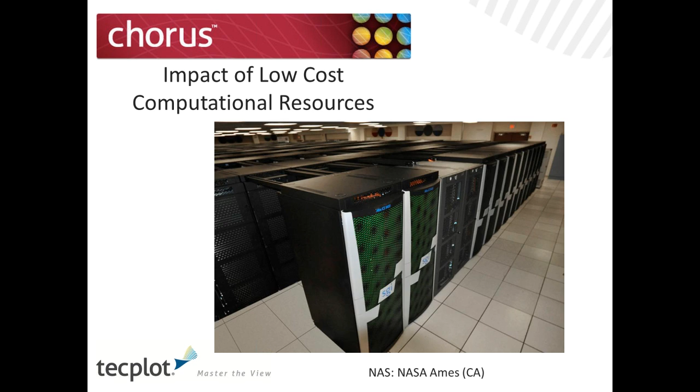And that includes actually hybrid methods, which we'll talk about a little bit today, where people are using low-fidelity simulation with surrogate models to apply high-fidelity simulation to model system performance. And what we've been working on here at Tecplot is really coming up with a solution for simulation analytics, which is really bringing together the analytics piece, which is new, I think, to this arena, physics visualization and data management, into one tool which allows you to analyze system performance.

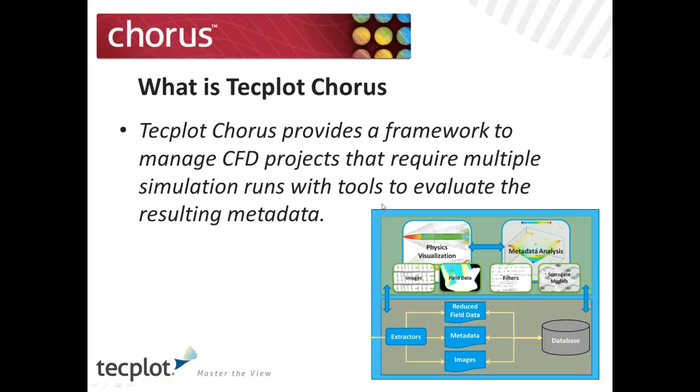Let me just first say, this is a collection of work probably done over a number of years by hordes of graduate students and undergraduate students. I get to kind of sit at the end and report on a lot of great things that go on here at the University of Colorado. So my intent is not to make it seem like we churned this out overnight and made it really simple and trivial; there's a lot of work that's gone into this.

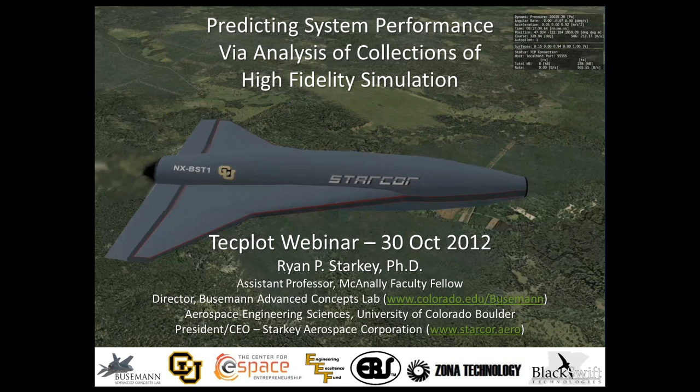So today we're going to talk about, as was mentioned, system performance analysis, looking at high fidelity simulation and how we embed that and understand what it implies for design. Obviously, as was mentioned, design is getting more and more complex, and there's lots of things that go into a rigorous analysis. As a university professor, we also really embrace engineering fundamentals, kind of back-of-the-envelope textbook level analysis. And so how do we bridge those two extremes when we talk about design?

So the overview for today's talk, some of it may be a review for many of you who are involved with design work, so I apologize for that. We won't labor on some of the really simple points, but just understanding systems development, what it means, thinking in the big picture context, looking at surrogate modeling, a couple of different examples of how we may apply surrogate modeling and why it's important, and then roll that back up into how that bridges those gaps for multi-fidelity data.

So for low fidelity, as we like to do a really good preliminary level design, we want to use low fidelity data. Obviously, eventually, we're going to need to use a lot of high fidelity data, and putting them together inexpensively is always the goal. And then we'll wrap it up with going over an application of a supersonic UAV we've been developing here for the last number of years, and then maybe draw some conclusions from it.

All right, so I guess the context first is important. Why are we interested in this? Obviously, multidisciplinary design optimization theory is great, and we do a lot of work in the fundamentals of that, as you'll see. But without a goal, students sometimes get lost. So we try to have both here.

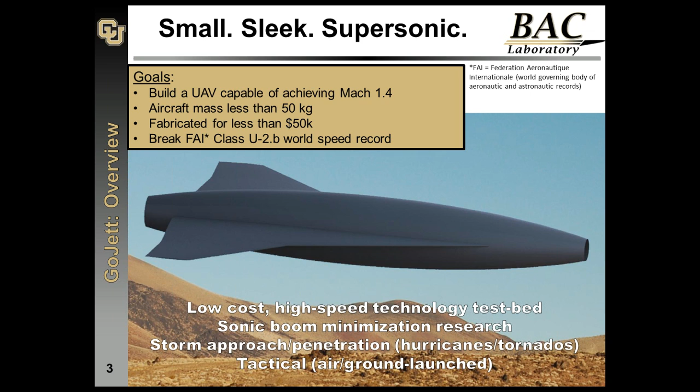Okay, so the basics of what this... I'm sorry, I'm having a controls problem here. Oh, there we go. Do you still hear me?

It's a team of students who are essentially learning as we go, both discipline and kind of engineering, system engineering as a guiding principle. So we have a lot of design challenges, and we don't have a team of experienced engineers with a lot of tools that they've used for years. We're kind of learning and training as we go. And so obviously to go through this sort of mission with the supersonic leg in the middle is not a trivial endeavor. So this is essentially our guiding principle of what we're trying to do, and we'll refer back to this later on at the end when we try to tie the tools back to this goal.

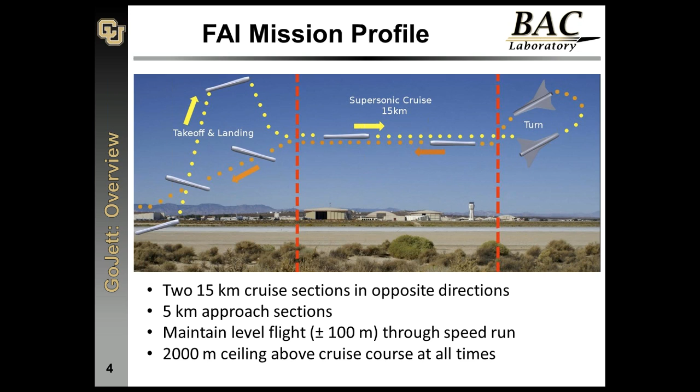And so, notionally we look at aircraft that we see today, maybe an F-22 or F-35, and think back to the decades that we've taken through both propulsion system, aerodynamics, and putting it all together. It is a long, complex, expensive endeavor to come up with a new aircraft design. So obviously, in the classroom and in the university setting, we're not going to go through that. We don't have 2 decades. We're happy to get their attention span for 50 minutes.

But if you look at the middle block, this is the problem that we always have. There's more conceptual designs than we can even maybe generate and or analyze. And so how do we go through this really simple design analysis? How do we boil that down to a couple of conceptual designs that we may want to focus on? And of course, this is easier to do. Sometimes the conclusions that link those 2 stages are not correct, but we can always down select from a lot of designs to a few designs.

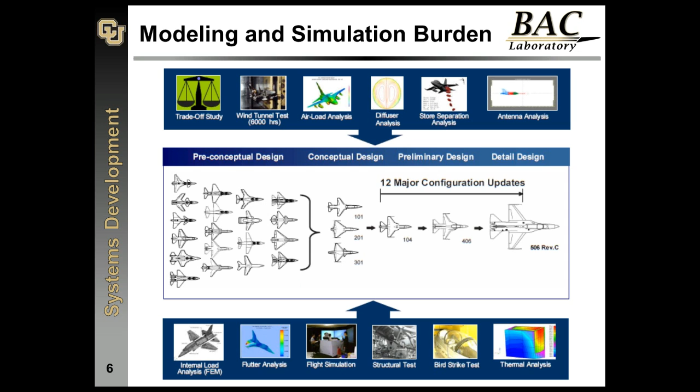So the goal of today is to kind of maybe bridge that gap. We're saying those are still important, but we need to think a little bit differently. So wrapping what you see here on this chart into maybe a software architecture, things get a little bit more complicated. Pictorially, looking at the pictures, we can understand why these things are maybe interesting, challenging, difficult. Even if I'm just a student who's focused on one particular thing, this is my one particular area of expertise. But eventually, everything has to essentially talk together, work together.

Tools need to be integrated. Sometimes they're loosely coupled. Sometimes you can use much more elaborate software to couple them, depending on your desires and your budget, really. But so this is a sample architecture for a high-speed vehicle design, and the same thing exists for really any vehicle design. So I continue to use this as a great example, but there's a design part, there's a trajectory part, there's, in case of high speed, and even for ours going supersonic, parts that require thermal protection,

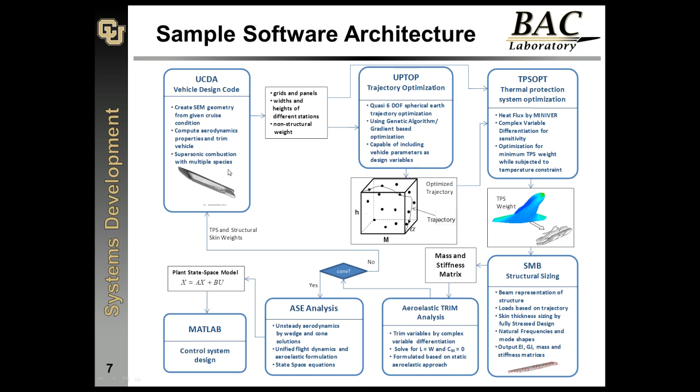especially around our afterburning engine. Structural sizing is traditionally a really hard thing to do in conceptual level design and preliminary level design. Aeroelasticity, again, a difficult component. Control systems. We wrap this all together and we try to come up with a vehicle. And generally, the way that this happens, I would say notionally, is low fidelity. So somewhere we need to talk between low fidelity or high fidelity and how to bridge the gap.

So the gap is really the surrogate modeling. How do we understand surrogate modeling? How do we put the pieces together where we can have a surrogate model that takes our complex data set and reduces the number of data points that we really need to run, so we can do a good job of minimizing our computational expense while still extracting the most usable information from our system. So the surrogate modeling, obviously, oops, I've lost control. There we go. There's a lot of driving goals of what we're trying to do with surrogate modeling that tell us what we're trying to do.

And so the extreme example I like to use is a high fidelity, say a large eddy simulation, CFD code that might take, on a complex case running in parallel, days, a week, depending on how much computer resources you have. It takes some considerable amount of time. Well, what happens if I want a wide understanding of my design? I need to run those cases to excess to understand the design limits: high angle of attack, high angle of sideslip, altitude changes, Mach number changes, etc. Well, what happens if I want to do that same level of trade study, or the same level of understanding, while I'm changing my vehicle configuration?

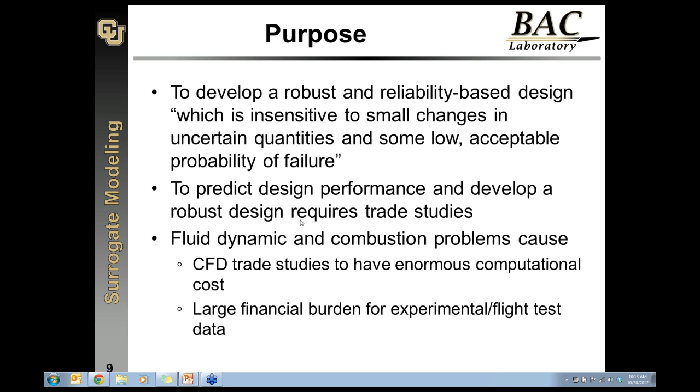But the computational cost when we want to understand vehicles, vehicle systems, vehicle performance, vehicle design, as I'm sure everybody's well aware, is a challenge. So let's make sure I have control here. So how we address that challenge is through surrogate modeling.

So if you're not familiar with surrogate modeling, really it's just what I call exotic curve fit meta modeling. You might hear a lot of different names for it. But it is just a way to take a few data points and extrapolate to a larger design space. So different models are definitely available, and if you search the mathematical literature and some of the design literature, you'll see differences for coarse or fine systems, how many data points I need. Are they ordered data points in a structured sense, or are they randomly distributed around a design space? Different models handle different constructs better or worse.

And of course, the goal is how do we use only a few data points for a large dimensional space to capture the physics. And then the other question we have to answer is, we're going to run a few data points, and maybe each one of these took 1,000 CPU hours, I don't know, and then try to understand how that relates back to our system, but with the question of, is the model we're generating even correct? Obviously, if the model is not correct, we're using it in a very dangerous way, because we're going to use it to predict design.

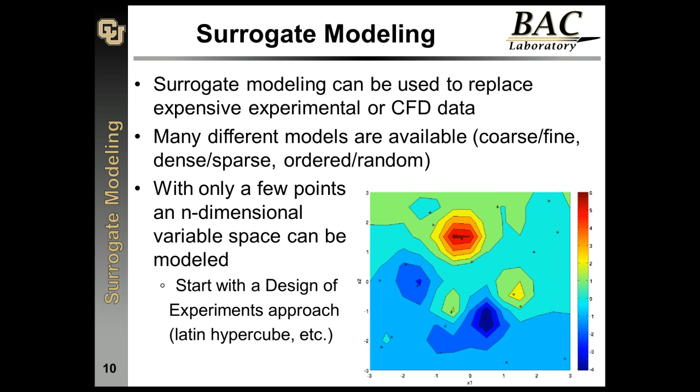So there's a couple of different things that have to go here. We can't just take a black box approach, put some data points into a generator, come up with a model, and assume it's correct. We have to essentially go through this test. And for anybody who's done something like a design of experiments, which is essentially an optimal approach to distributing your set of data points to minimize your costs, such as a Latin hypercube approach, these are very good places to start with a data set. We want to minimize the number of inputs, distribute them around our design space as optimally as possible, at least initially, and use that as a good starting place. And so that's what we will do.

But this is the danger of any sort of curve fit. Really, we can fit anything. How good it is is another question. So with Kriging, there's definitely ways to do optimal positioning of new points based on the maximum likelihood of error of the existing model. So sometimes you may extract one point, test your model to see where the maximum likelihood of error is, and then use this sequentially to add points and keep essentially pinging your model against what you think reality is, or the pseudo-reality, and minimize the sensitivity of the model to the point addition.

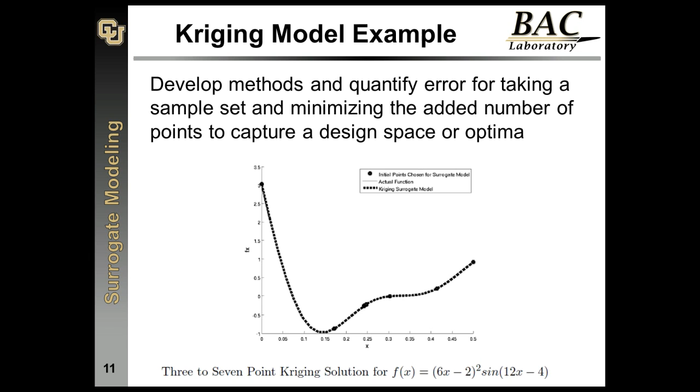And so the next chart is a really brief algorithm example, so that when you maybe look back at this later on, you have a complete idea of what is going on. We have a random input, and in this case we literally use some random inputs because, for this example, it stresses the data in a little bit more interesting way than using a really good design of experiments.

But we select some sort of inputs, we build a surrogate, we run our functions at some of the surrogate points, we can validate the surrogate, we can re-add new data points, and then continue to go around this loop until we're happy with the surrogate. And so in this case, the surrogate becomes a very interactive feature with design. We need to start our design and then let the surrogate essentially drive where new data points go after that.

And so this is, I'd say, the one piece where it's different than maybe how education is generally done, where we generate a lot of data and just fit it, hoping that it's going to be good because we have no more data to add, we can't run another test, we're not going to run another computation, and that works fine as well. But I think the real advantage to surrogate modeling is to use it as an interactive guide.

So we're going to come up with the best first estimate of our design of experiments, and we're going to use that to push our design forward, while using the surrogate to drive where the next points should go. So either computationally or experimentally.

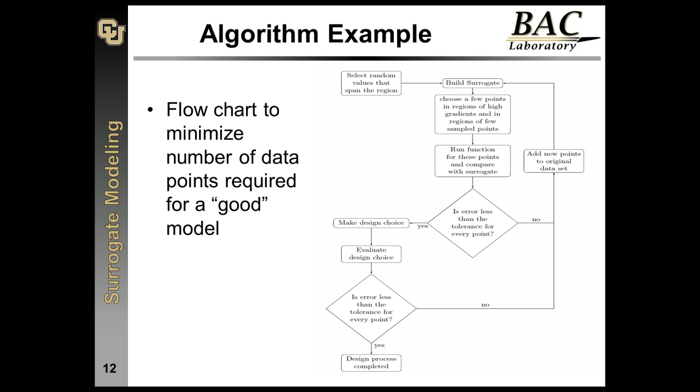So going on from here, the next step is obviously if we're looking at complex system design, we want to build a surrogate. We want to understand, in the same light as before, how do we build a surrogate that matches our design space without knowing where our design space is.

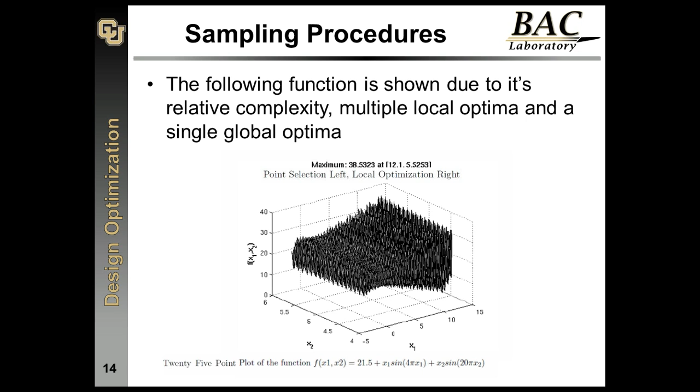So in this case, I would want to have a way to start my system, create some initial data points, and what you'll see is we're just going to do an initial random sample of 25 data points through this space and come up with a surrogate. And what you see is a surrogate that doesn't really represent the data well at all.

But what we're trying to do is use the surrogate to help drive the data behavior: where should we focus in, where's the right region perhaps, and can we use that to focus where our next series of computations are. So when we do some more expensive computations or some more expensive experiments, they're done closer to the region of interest that we're really going to hone in on.

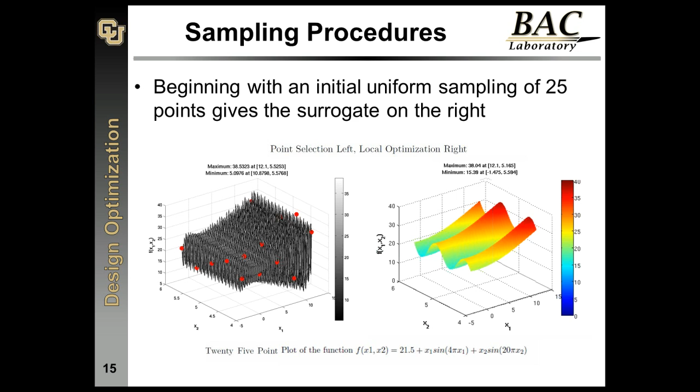So in this case, 25 randomly distributed points did a really poor job, I guess if that's the correct word, of capturing this design, because there's nothing that's going to capture this design. But we use that to down select. So the system says, well then here's the region of interest. It's back here, back in this corner. So let's kind of hone in on there. We'll add in some points, and we'll do another surrogate.

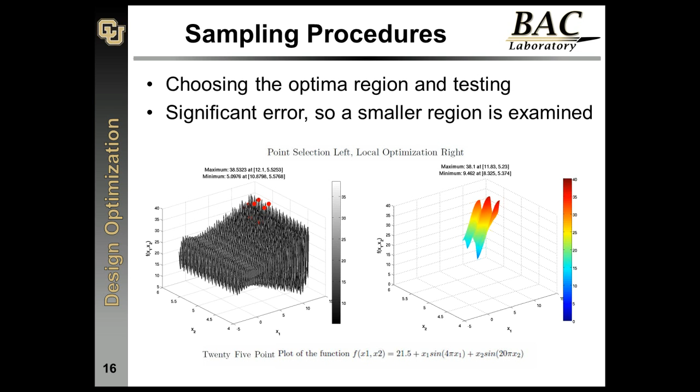So now we've honed in again, and again, the surrogate does not match the space. What we're doing is just randomly populating. You see some are near the peaks, some are near the valleys, and it's coming up with a surrogate of what this system is doing. And we're going to go through this procedure again. We're going to hone in again to the back corner.

So when we put it all together, what you see here is, we were looking for that maximum point, and so our design was focused at that. So the error that we achieved in the surrogate at the maximum point was about 0.5%. I'm blanking here at the number of total data points, but what we did is took a complex space, initial surrogate, and we start to build. So what you see in the final picture on the right is this compilation of all the data points for the overall surrogate. So again, it does not match the correct data space, but what we're looking for is where's that right region of interest.

And in this case, the surrogate model function value at that maximum point was off by 0.5%. The minimum, which we weren't focusing on, was 14%. So again, if we want more information, we need to take more data points. And we do get some X and Y errors from where our positions are. But what we have effectively done is gone through a very expensive, very convoluted design space with a pretty good success rate using a minimal number of inputs.

And so this is really a good extreme example of where and why surrogates are helpful. Obviously, we're not going to be able to populate this whole data space with computations to map it out correctly in any event. The best we're going to do is come up with a number of good points and a data structure that hopefully represents it. So I think the good news is, especially for complex vehicle design, nothing ever looks like this. So this is really an extreme example that shows the functionality of using surrogates and surrogates for optimization.

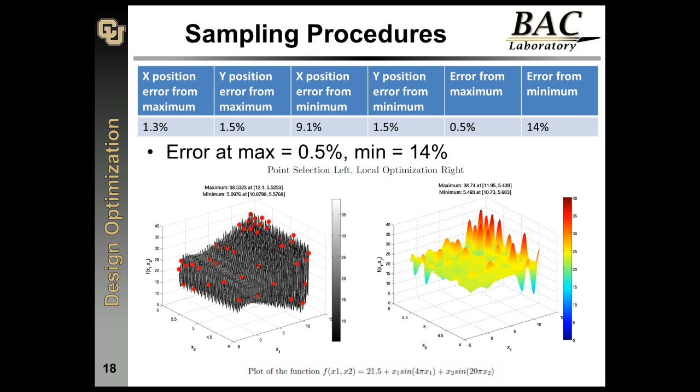We have an n-dimensional design space, and here our n is 10. As we go to more complicated designs, we're going to get away from some of these, I'd say, simplistic design parameters to much more refined design parameters, and that's going to make that curse of dimensionality, or that overwhelming amount of data, something we're going to have to figure a way to deal with to some degree.

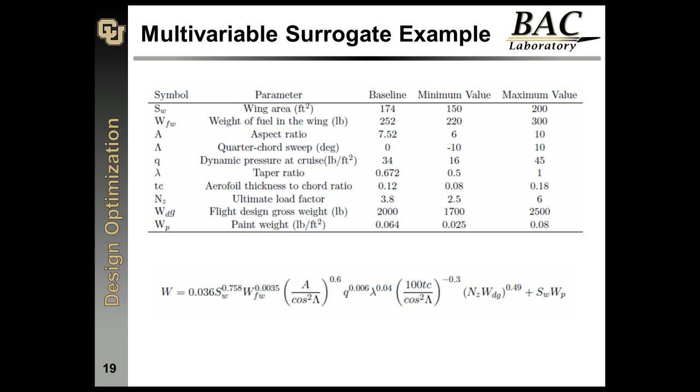So when we look at multiple dimensions, what we see is this. We can essentially create, at least in a visualization sense, surrogates of all of our input parameters, all the things that drive our design. We can look at how they all correlate one to another, how they all contribute, which ones are fairly benign and linear in a sense, which ones become a little bit more nonlinear in behavior that we may need to focus our design in a little bit.

So again, in this case, we tested this with just a random set of data inputs and created some surrogates. What you see is some hopefully very traditionally understandable behavior, interaction between some of these variables, sweep and wetted surface area, et cetera. So there's nothing, I would say, hopefully brand new knowledge that's wrapped in here, because it's a very apparent problem that we're working through in terms of aircraft design, but it does show how we can now use surrogate modeling in a lot of dimensions and start to at least use that to drive the analysis.

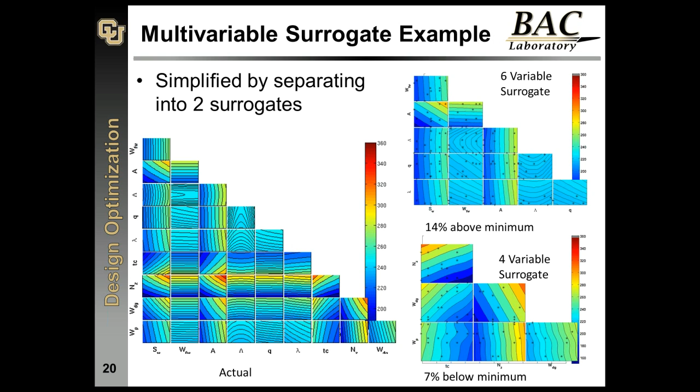So if you extrapolate this backwards to a complex system design, what this is going to give us is a way to understand those parameters we really want to focus in on. And of course, what we also have is maps or surrogates of our entire design space, where we can now put this into an optimization routine and use this surrogate to do our design. So surrogate models are a very powerful tool. The one way that we've been looking at doing them here at University of Colorado is, of course, now multi-fidelity.

We like to start very academically. It's very similar to the last problem. How do we understand the design problem, boil it down to its meat and potatoes, do some back-of-the-envelope calculation, which we know is prone to some error, but it points us in the right direction. And then inevitably, like any design, we're going to want to do some validation. We're going to run some high-fidelity simulations of our low-fidelity designs and see how they calibrate. And so that's generally, I would say, a practice that's done.

What we're interested in doing is maybe pointing that backwards a little more. What you see here is low-fidelity data. That's kind of a standard approximation. We're going to run high-fidelity data, possibly at the same data points, to understand what is happening. And what we're trying to do, as you see in this very simplistic block diagram, is understand that error, which is what always happens in design. I come up with an approximation, I run a simulation, I want to understand how good my approximation was, which is great. I'm understanding a fine point of error.

But what we're trying to do here is use surrogate models to calibrate that entire data space. So if I can boil my problem down to some much more canonical, simplistic versions, which you'll see here in a second, then I can run low-fidelity data, in which case ours is an analytical model. I can run high-fidelity CFD data. I can understand the differences between the two. And then what we're doing essentially is mapping those differences back onto the low-fidelity model. So now I have a surrogate correction to a low-fidelity analytical model that's going to hopefully give us better results.

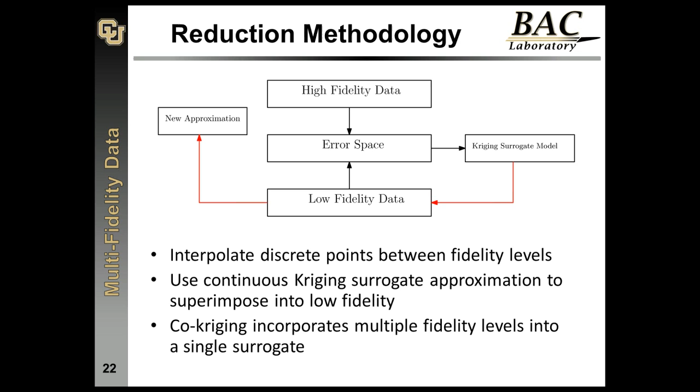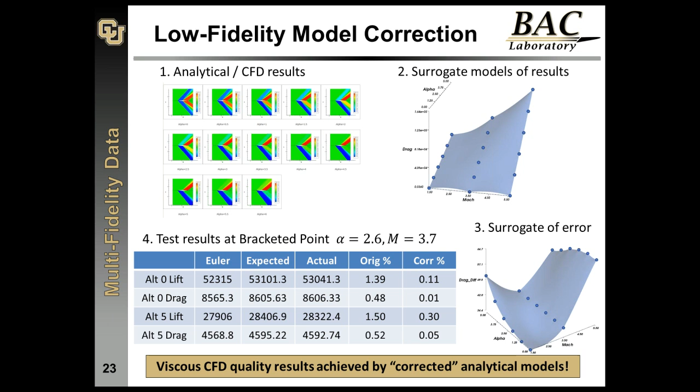So, pardon me. Wrapping this up, surrogate models are a phenomenal tool for data space reduction, sensitivity analysis, design understanding, optimization. Inevitably, assuming that the model is correct and the correct reproduction of the actual data space is going to reduce our expense considerably. Now, of course, if the model is not correct, then it's going to send us in the wrong direction, and we're going to end up wasting a lot of time in the wrong area of the design space.

Multi-fidelity approaches, there's plenty of them, such as co-Kriging, putting low fidelity and high fidelity, in our case here, training a low fidelity model, two ways to kind of approach design in an efficient manner.

Now, I'm not against computational results at all. Computational results are essential. But I do have this feeling that there's overemphasis on computational results, which says, well, we're going to optimize with some computation. It gets us an answer. We have no idea how, where, and why we got to that answer, but it does work. It's an optimal.

Likely when you do optimization, unfortunately what you also get is a lack of robustness. It becomes very sensitive. And so surrogate modeling lets us fill in that gap. It lets us say, what does this actual space look like? Where's a region of optimality, and where's a region maybe of suboptimality that's less sensitive to perturbations or uncertainties that we haven't actually quantified yet. But regardless, surrogate modeling is an essential tool to go through complex system design.

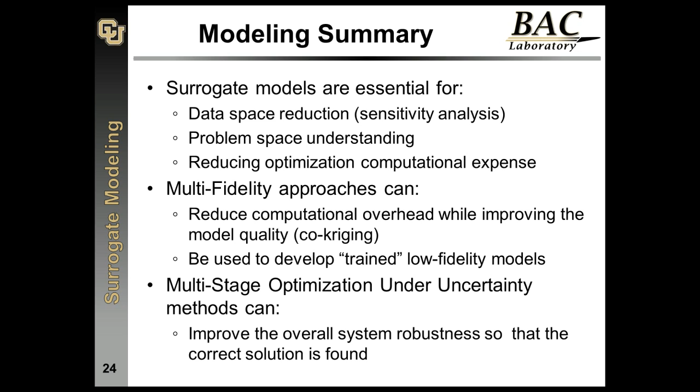So that kind of laid the groundwork, and I'm going to spend the next 10 minutes or so going through how, in our system, what we're looking for is this vehicle that I introduced at the beginning. How do we actually go through design? What does it mean? And now that I've kind of talked about the modeling side, the surrogate side, the design side, what have we left out?

So again, this is back pointing to that curse of dimensionality. We're not going to solve it all. We can't solve it all. We need to make some good engineering judgment through a sensitivity analysis, maybe up front, as to which design parameters to focus in on. Inevitably, we're still going to need to work on all the design parameters. We'll go through maybe a surrogate modeling approach, as we saw before, looking at all the system.

Which ones do we need to focus on? Which ones can we put off to the side as secondary parameters and go through design? And of course, this exists in every problem. It's just that sometimes we don't notionally go through it all in this sort of rigor. We compartmentalize what we know is important, we focus on that, and then everything else fits in later. But the corollary to that is often we can get ourselves into trouble using that method if we don't really understand our system. So surrogates are essential to go through this.

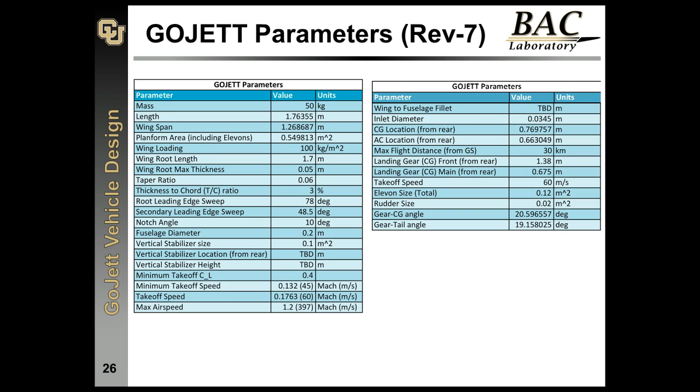For our particular case, we have a lot of design challenges. As I mentioned, we are going supersonic in a 50-kilogram package with a team of really great, ambitious students. We've had about 60 students over the last 4 years working on different aspects of this design. And so part of it wraps into student training, part of it wraps into design modification and understanding, and some of it is just understanding different tools and things that students need to become productive members of the engineering community.

So, our design doesn't necessarily fit into the nice package that I'd like to believe it is, where we put it all into a bunch of software, churn the handle a bunch of times and got an answer out. So multidisciplinary design optimization, especially in the team sense, becomes more complicated as well. But a few of our design features and challenges here: aerodynamically we have a low drag Sears-Haack fuselage design, a pitot inlet, which is a really great inlet up to Mach 1.4. It's not initially great for our entire fuselage and packaging, but it makes a great design feature, especially for a team that's learning as they go.

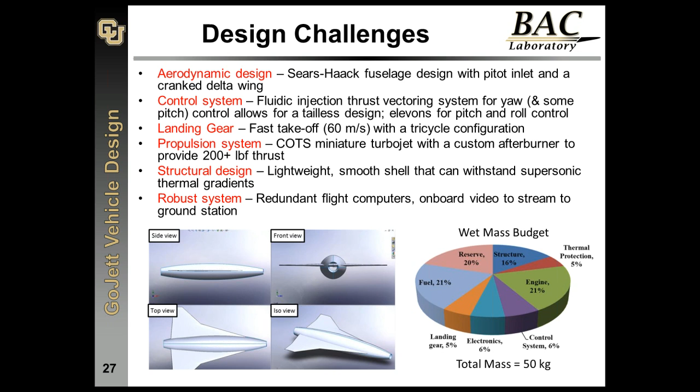Tecplot Chorus has been a lifesaver to us in a sense that it lets us pull through a lot of data very quickly. Now we can do this, I'd say, ad hoc, offline. We can pull up one figure, look at it. We can pull up another figure, look at it. We can kind of do some back of the envelope or some analysis through our data sets and churn it through our own post-processor and come up with some answers.

This way is much more efficient. I can look through it. I can understand it. I can see what I'm doing. I can look through for data features in all my data sets simultaneously. And for that, it is a joy to actually do design. But this is kind of, I'd say, where we always start. Aerodynamics is the first place for aircraft design.

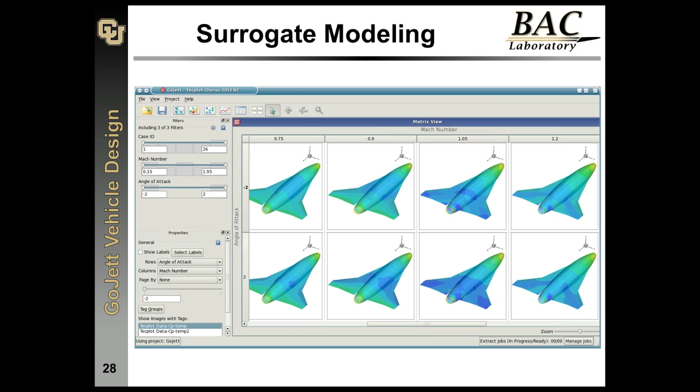Once we get into more details, if we're going to design a propulsion system, which we have been working on, we have our own simple analysis, a very simplistic, back-of-the-envelope, classroom-level Brayton analysis. We can go to a different feature with some different levels of fidelity, or then we can get into things like thermomechanics, rotor dynamics. And again, we have, even within one subsystem, our own little curse of dimensionality.

Where do we focus our time, effort, resources? Where's the big payoffs? Some of this comes down to that understanding of the system and subsystems, and some of it comes down to the surrogates that are going to help look through our design. So the aerodynamics and propulsion, this is a good place. This is where design starts.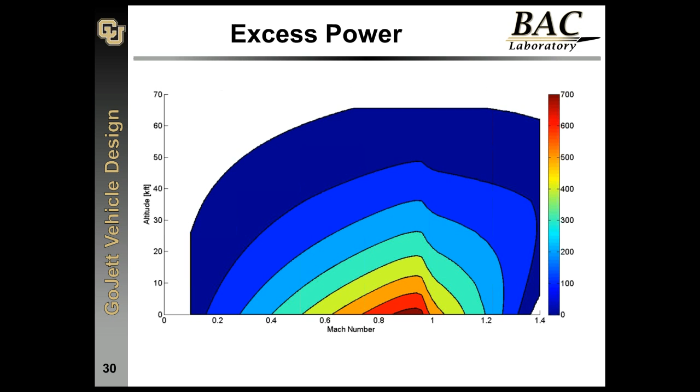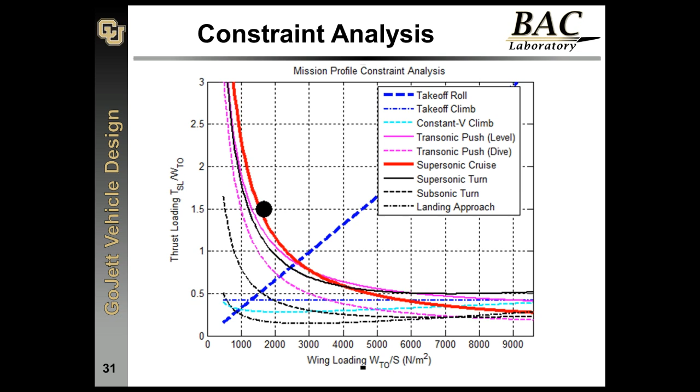The next step is where probably most aircraft design never really gets to, especially in the academic sense. Obviously structures doesn't lend itself well to a very simplistic analysis. It's either a mass ratio, or we're going to push through to some more detailed modeling. Once you do detailed modeling, you need to know some very specific design features. So we've gone to low fidelity aerodynamics and propulsion in a sense, and now high fidelity ANSYS of the structure. We did some high fidelity of the engine as well.

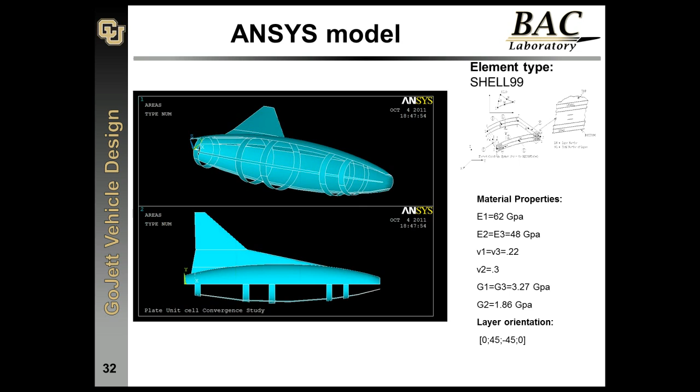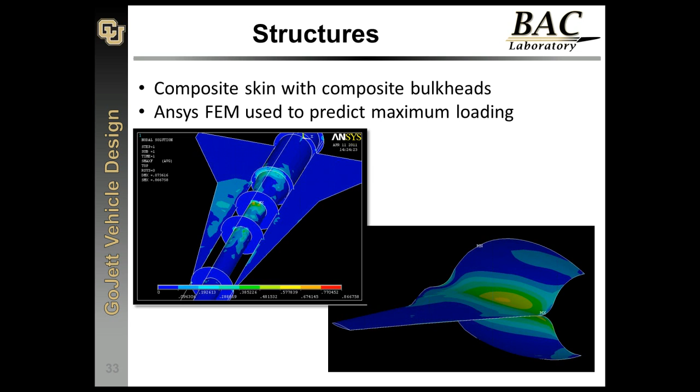But going through this detailed analysis, now we have to understand how these pieces put together in a meaningful way. If we want to go through a lot of design perturbations, we better have a good way to not only do this analysis, but also to model our way through it in a surrogate sense, so we can extract the most important design features and help do some optimization. And of course, internally, there's the other aspects, like maybe data wiring. Where's our telemetry? Where's our power? What has to go where?

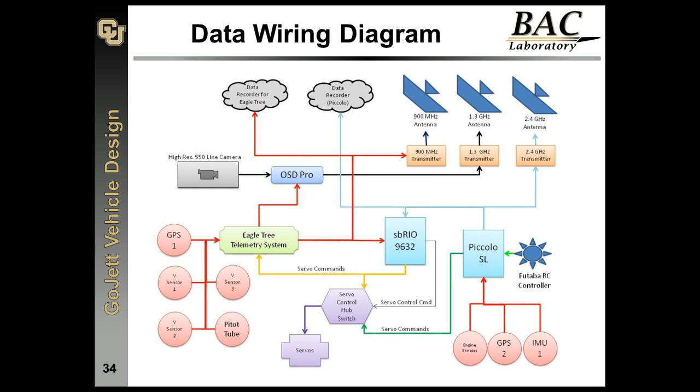So it seems like if we look through this system, we can go through a lot of detailed analysis and design, and it feels very good. We feel like we've done a good job, but unless we go through the testing side to compare, of course, we don't know what we've done.

I'm getting a question here about audio. I am using the computer audio, and hopefully it's coming through pretty clear. I did have an error early on, but it seems that it's gone away, so if it's still not coming through clearly, I can transition. I don't think that'll be necessary, Ryan. We're hearing you loud and clear. Okay, thank you.

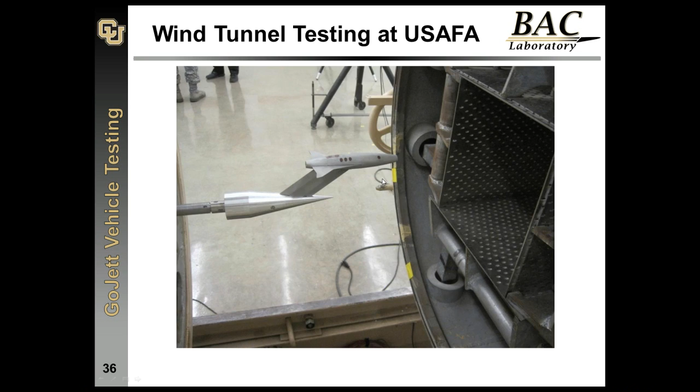So if we look at testing, of course, now we're going to build a model. It's not going to look exactly like our system. We're going to want to do some testing, create some Schlieren images. In this case, the Air Force Academy was very gracious to let us do some testing there.

In the end, we've done a lot of modeling, so testing is great, but unless we can go backwards and now pin it to our modeling and say, hey, at least our modeling is matching our testing, which is matching hopefully our surrogates. Now we can use our surrogate to do a much more rigorous design optimization because we have a lot more detail and we've kind of hopefully pinned it in a few right cases.

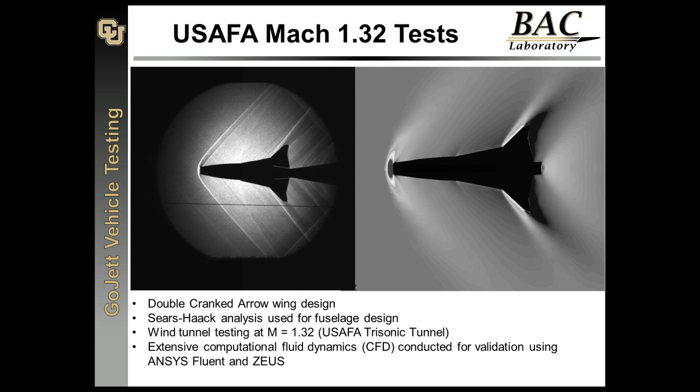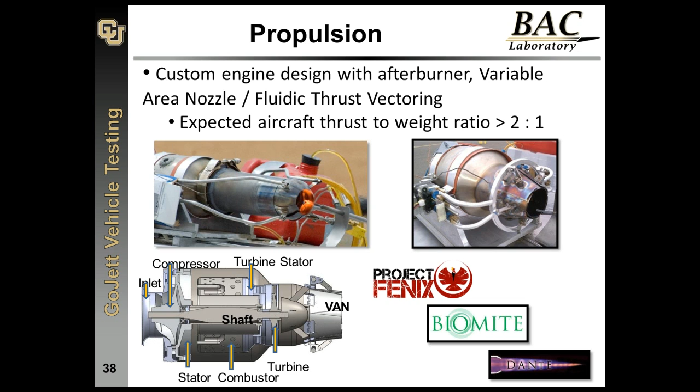Similar for propulsion, we've done a lot of propulsion testing here, a lot of propulsion design. You see a few of our sub-projects that we've been running over the different years looking at different components of afterburners and nozzles and thrust vectoring and biofuels and the works. Anything you could think about we've probably played with at one point or another. But in the end, this comes back to, we need to put this into our aircraft. Our thrust to weight of our entire system is about a 2-to-1, so it gives us a nice place to sit. Kind of wrapping it back up now, we need to put all these pieces together and integrate.

Oops, I've lost my picture.

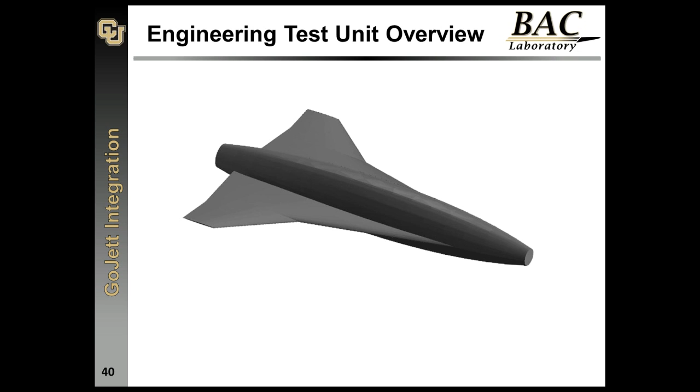Oh, there we go. So this is kind of where we start. We have an aerodynamic configuration. We've done some good work. We've modeled our propulsion. We've modeled our electronics. We've modeled our structure to some degree. And it kind of has this nice looking feel to it. We've done a good job. But the hard part is what happens when you actually want to integrate.

Where are those landing gear going to fit? We have to obviously do a landing gear analysis to make sure we get the right angle of rotation on takeoff or on landing. This kind of odd configuration, they have to fold up and fit in somewhere. That comes into mass balancing and CG, which relates to our aerodynamics and control. In this case, you see our servos for the back elevons are way up at the front.

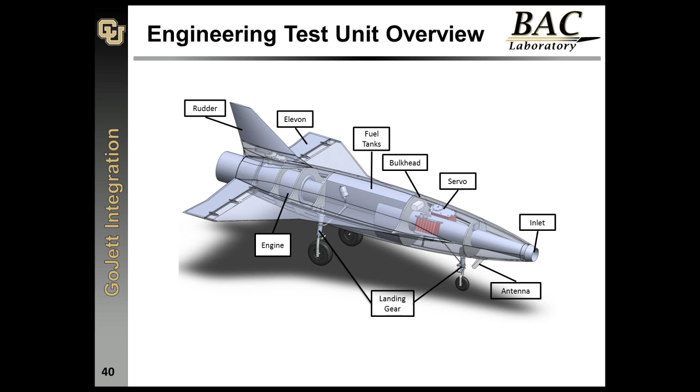Packaging and design, this is where I'd say design is somewhat left off. Design gets us to a point. Once you start going through integration, it's a little bit bigger headache, I would say, in terms of where does everything go? Can you actually fit it? Is it going to balance the way that we anticipated it would? And can we make some sense of this system?

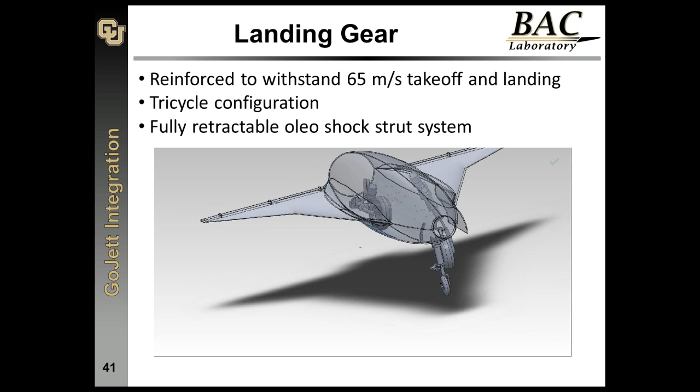In this case here, how our landing gear is actually going to fold up into our system. As I mentioned, our gear is custom. You see some very intricate folding. Our front wheel has got to turn up into our belly to make it fit. And so this is, I'd say, the challenge between good design theory and modeling that we teach, and then the practical aspect of actually what it means to design and build.

So, in the end, you hope you've designed in a space that has some sort of robustness to imperfections, to changes. Now, if you're doing pure optimization, sometimes it's very easy to get tricked into something that's truly optimal but completely horrible for a practical sense because it's so sensitive to any perturbation that you're going to be on a cliff no matter which direction you turn.

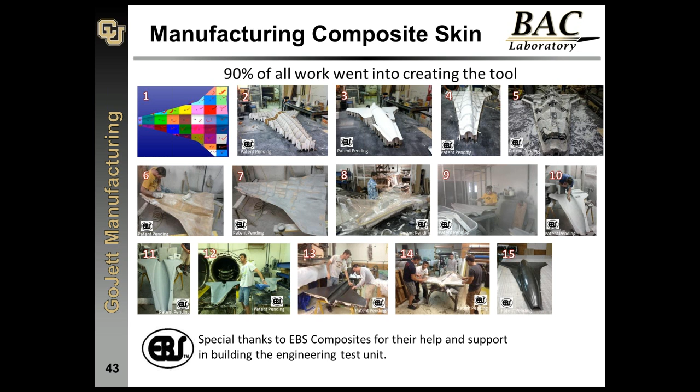So here's at least our final vehicle. We're still going through integration testing, but looking through the future of design, we're not done our design yet. A lot of our experience with our students is training on design, training on construction, training on flight test engineering and flight test preparation, and so we don't focus on one or the other. And of course, a lot of our graduate degrees are focusing on really the fundamentals of the tools. But design is a challenging piece, and I think we're never going to get to complex configurations like this or others that are much more complex without the benefits of surrogate modeling.

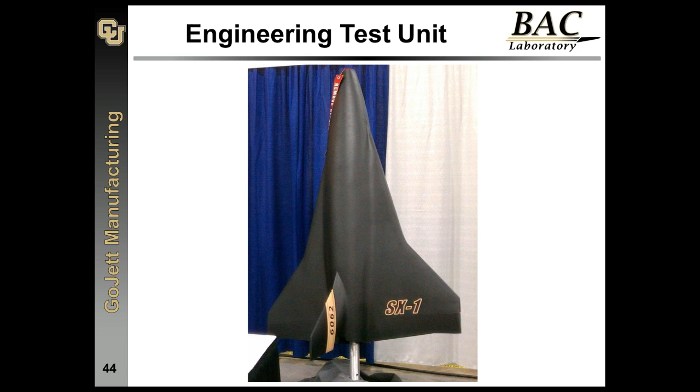So, in a wrap up here, I'm going to just go quickly. Here's our test. We have a lot of things. In terms of short-term, where this really fits back in for us is back to validation. We're validating our low-fidelity tools. We're validating our high-fidelity experiments and computations, and then we're going to, in the long term, go back and go through a critical design review once we get through flight tests and pin some of our models in place a little bit better, and then go through one final design revision.

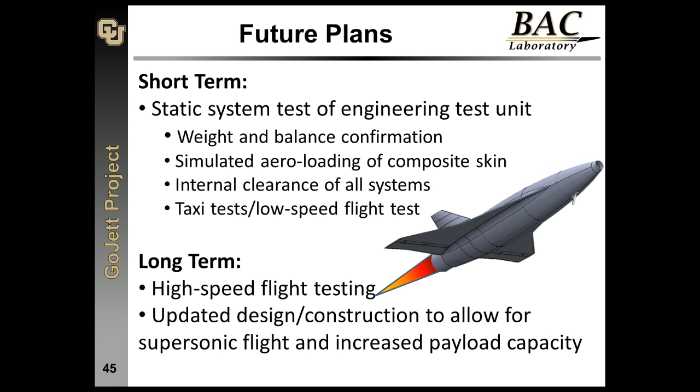So I did mention Tecplot Chorus here. Tecplot Chorus has been truly valuable to us to get this level of design space exploration, surrogate modeling, being able to understand. As a long-time Tecplot user myself, I've always found a lot of hidden data in any particular plot or something I've generated.

I've gone through and created 6-dimensional data plots using Tecplot, which is phenomenal. But now when I put it in Chorus and I can create surrogates and all these different things and make some interesting predictions and extrapolations based on a lot of different data sets, it really helps us do our job well.

So I think that's really it. The bottom tagline is really, I guess the key is complex system design is really not possible, especially efficiently, without surrogate modeling and effective surrogate modeling design. So I think that wraps up.